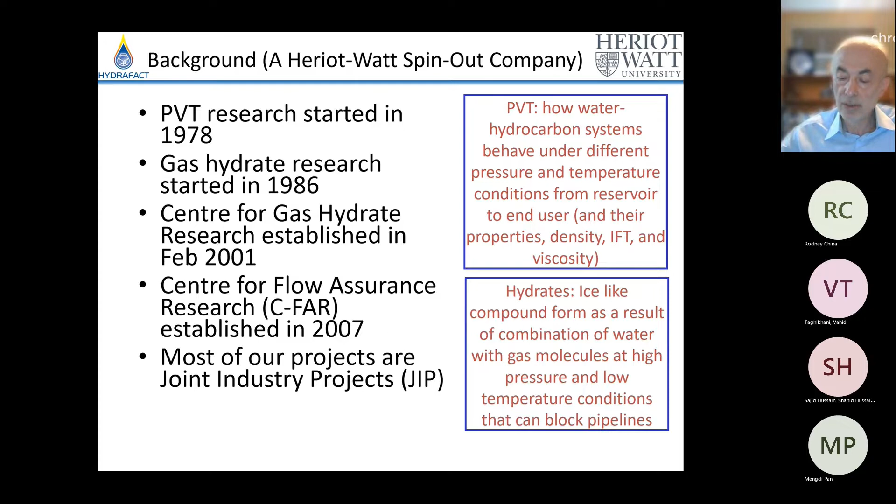So HydraFACT was formed in 2006. And why we formed HydraFACT? There was a lot of demand from industry. Because as I said, most of our projects are joint industry projects. After a while, people from industry trust you because we had 6-monthly meetings. They trust you and they have problems in their operation, and then they ask you, can you solve it? They have seen your ability, you say yes, but obviously you cannot charge that project because that project belongs to everybody. So we end up doing one-to-one projects.

These projects normally are short-term, while JIPs are 3-year terms. And the reason for 3 years is because we use JIPs to train PhD students. The university was not very happy that we spend time on consultancy because universities in the UK are judged based on the number of papers and number of PhD students. So the best way to move forward was to form a knowledge-based company that uses the technique in the university and in a way commercializes it. So that was the background to forming HydraFACT.

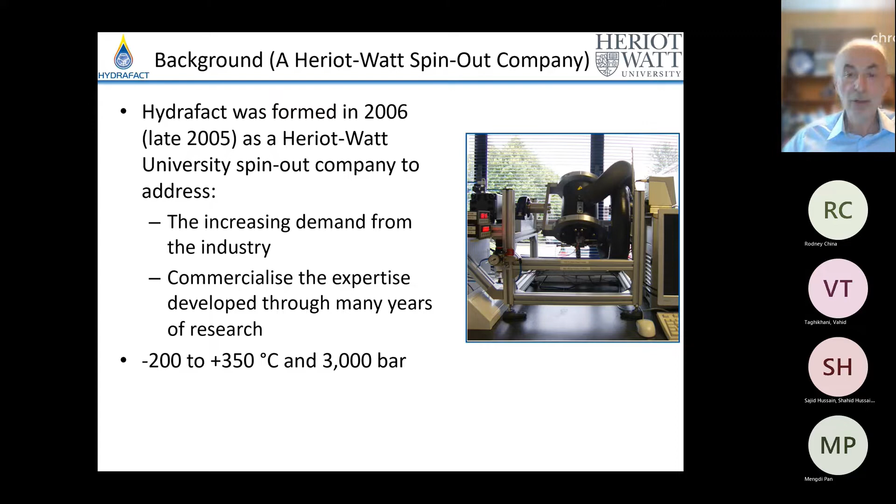So what do we do? We do flow assurance. Flow assurance means making sure of uninterrupted and cost-effective production from reservoir to end user. And the area that we cover is, we started with hydrate and then wax, asphaltene, salt, emulsion, foam, scale, corrosion. So obviously you can see that naturally, when you see an opportunity to grow, you use it.

And the other one is PVT and properties of reservoir fluid, as I mentioned what it means. We used to work on, well, we still are working on CO2 and H2S. And now we added hydrogen to our portfolio, because we have the same experimental equipment, and we can use it for hydrogen as well.

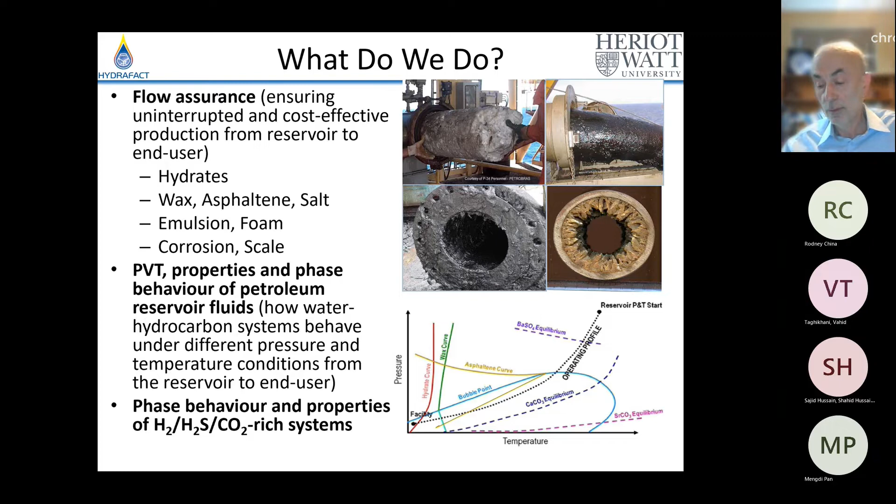Our area of activity is consultancy, training, and providing experimental facilities to other labs, government, oil companies or research institutes. Consultancy can be just technical advice. People want our experience and we tell them if you do it this way, it's better. Or sometimes it's necessary to do some experiments, or we need to do modeling. Our technical advice comes from many years of experience. Experimental: a wide range of equipment, including an H2S lab. And modeling: we claim we have the best software on water, hydrocarbon, solid.

Now we have training as well. Open courses, in-house courses, hands-on and resident courses. Some companies send their staff to be trained by us to work in the lab efficiently. So they come to stay with us for 3 months, 6 months, or to use some software. In-house, if a company needs some training, we can go to their offices. Open courses are the courses we announce and people register for.

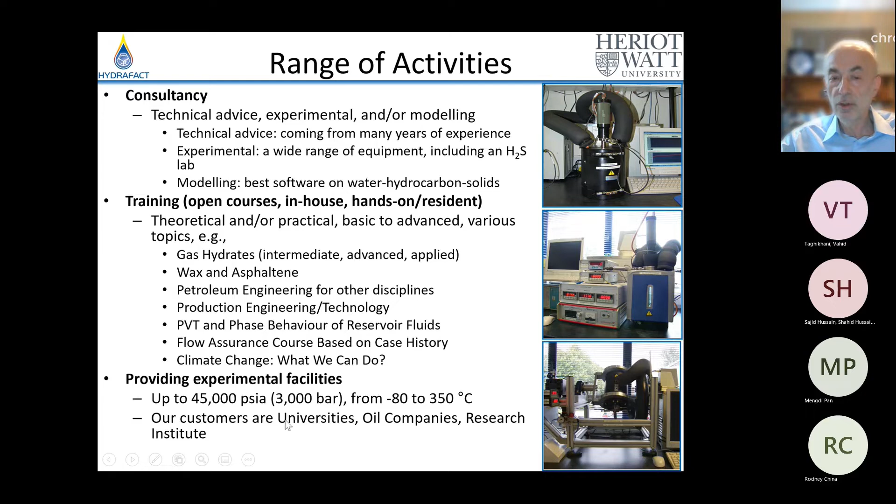Experimental facilities. We can build equipment, high pressure, and from -80 to 350. And our customers are universities, oil companies, and research institutions. So these are the 3 areas that we are active in. And the other area is software.

And our software for hydrate, wax, asphaltene, PVT, and properties of reservoir fluid has been ranked the best by independent evaluation. Available on annual, permanent, individual, or multi-user licenses, and also with a discount for the academic version. The academic version is the same, but we don't give them permanent licenses. The reason is that we have had the experience of professors or researchers leaving and taking the software with them.

And a 30-day trial is always available, only for assessment. They cannot do any calculation. They cannot do a consulting job. They cannot publish a paper on that.

Technology transfer. Being in close link with Heriot-Watt University, we commercialize the ideas which have been developed by my own research group at Heriot-Watt. One of the equipment, HydraCHEK, monitors the hydrate safety margin.

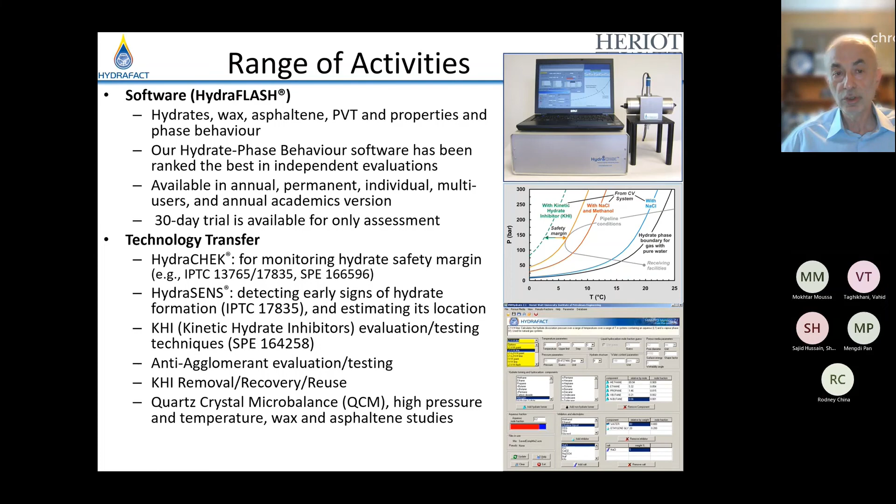So these are some of the technologies that we are transferring to the industry. We are available for transfer. As I mentioned, we won the Queen's Anniversary Prizes in 2015, Experimental Science and Innovation for the Oil and Gas sector to improve production and reduce contamination. We were able to extend the life of a reservoir by 5 years, reducing methanol injection by 28,000 cubic meters per year, and eliminate the need for a de-propaniser.

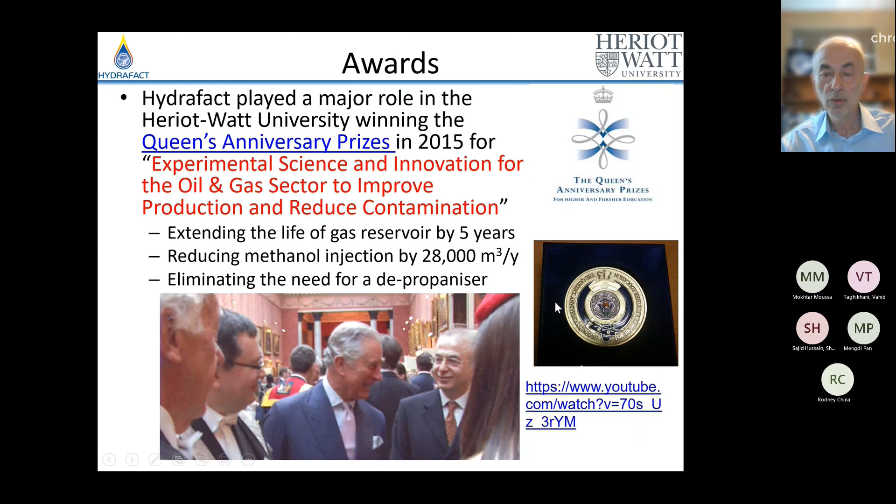And this is our head of university. And this is Prince Charles, and that's me. And this is the award. So the university was very proud to have this award. And I was proud as well.